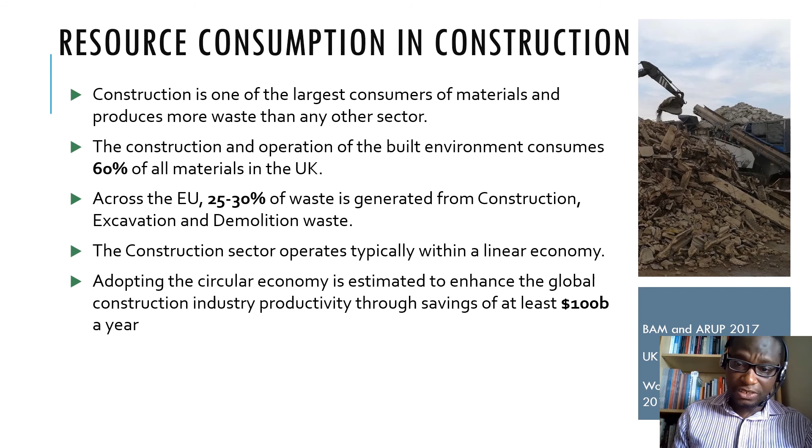And it has also been estimated that this transition could yield global productivity savings within the construction sector of about $100 billion a year. This was estimated during the World Economic Forum in 2016.

So what is the linear economy then? The linear economy is based on a take, make, and dispose model of production, where materials and resources that we use, say in our projects and built assets, would lose value over time and degenerate into waste. We are all familiar with that.

And whilst there have been regulations that have diverted a lot of the waste from landfill, landfill tax and the like, a lot of these still end up as less valuable materials, or sometimes materials that are having to be incinerated to generate energy from the waste.

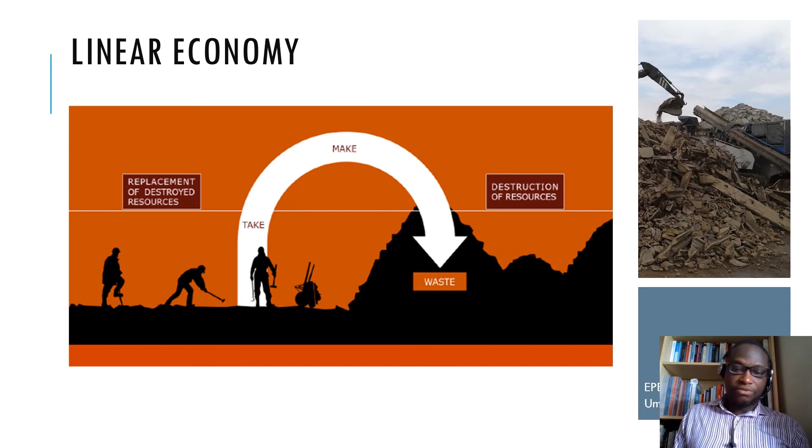The circular economy, on the other hand, is an alternative sustainable economic paradigm which seeks for materials to be kept constantly as useful resources, useful and valuable resources over time.

And these can be achieved, this constant utilization of materials by giving them, or adding value to them, can be achieved through reuse, recycling, repurposing buildings, remanufacturing, and things like that, maintenance.

So some of these are things that we already do very well in the industry, but there are also opportunities for a whole lot of other business models that can revolutionize the circular economy within construction.

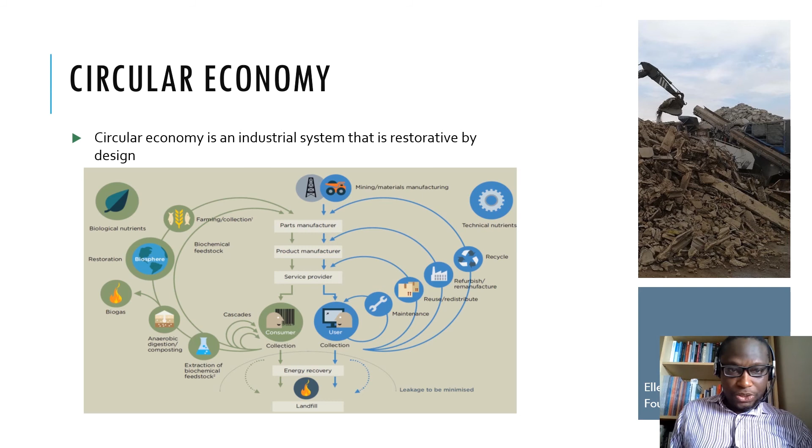So how can we achieve such a transition? It's very important that, in any effort to transition towards the circular economy, we drive that through the supply chains that typically are the lifeblood of the construction sector. And so supply chains that operate in the industry can begin to adopt more circular business models.

Again, when I use the term business models here, this is just the logic that underpins how organizations would identify, capture, and then deliver value to clients. So supply chains that adopt circular economy business models, I would call here, circular supply chains.

And so how can we transition our supply chains from linear to circular supply chains, since they predominantly operate based on a linear model at the moment?

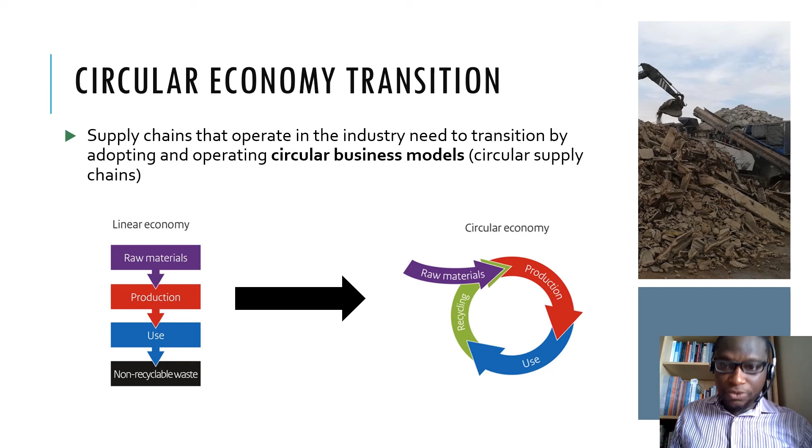And so there have been different typologies of circular business models, and in my own presentation here, I've classified these different typologies into several of them.

With circular design being firms that have specialized in designing for circular economy, designing circular buildings, circular infrastructure because they have the expertise to do so, or designing products that drive the circular economy, products that are easier to disassemble at the end of life of buildings. So we are looking at firms with expertise in, say, design for disassembly or design for adaptability, design for demountability, and things like that.

Circular construction business models, again, this would be for firms that want to package themselves and specialize in constructing or assembling built assets for the circular economy.

The products as service concept is based on firms specializing in selling the performance of their product rather than selling the products themselves. An example is the Philips pay-per-lux model that has been experimented with in Holland. But you can also have things like boilers being sold for their performance, so that the company still retains ownership of these, and people pay a reasonable amount for the service.

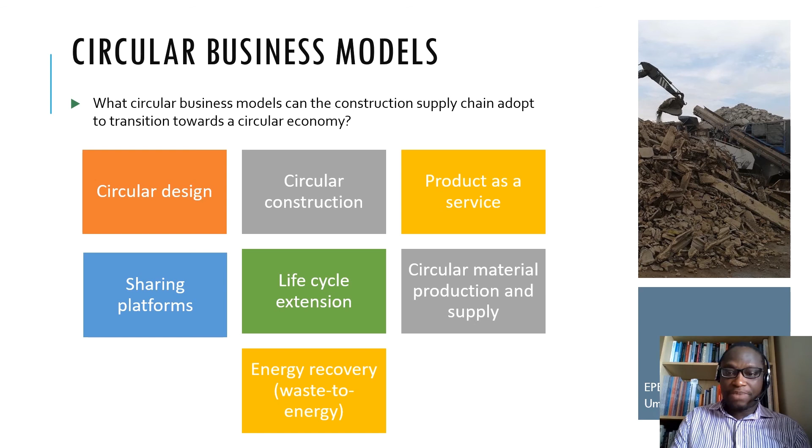So these are some of the circular business models that span the life cycle of a project from design to the end of life.

In the next 10 to 15 minutes, I'll be going over some of the resource consumption issues in construction that make it necessary to transition towards a circular economy, some of the circular business models that can be adopted, and some of the critical success factors for transitioning the supply chain towards the circular economy.

Now, how can we get more and more firms to begin to operate some of these business models that are more circular in nature? We carried out a study last year in France. Predominantly most of the firms were from France, and 3 of them in the UK, but in total we spoke to 14 participants. All these firms had adopted the circular economy and embedded principles within their business, and were operating as such. So we wanted to understand what are some of the issues, the critical success factors, and the like.

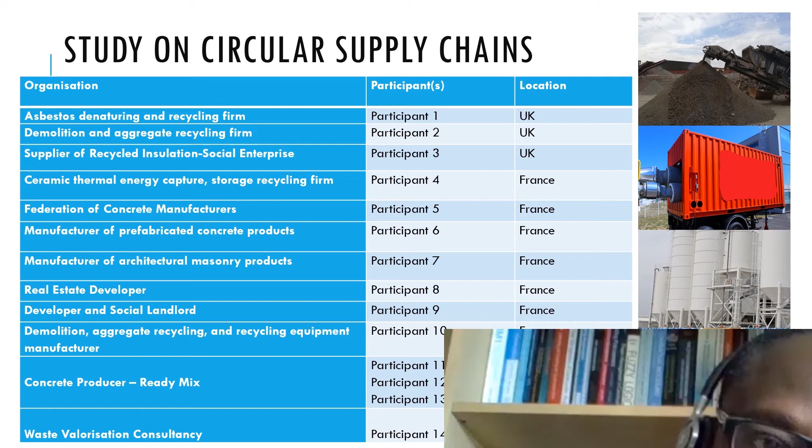To give a summary of some of our findings, one issue raised quite a lot was that there was still a need for more maturity in the market on the demand side, in terms of that critical mass of demand for circular products that would really get the transition moving.

That is quite interesting because it presents opportunities at the moment, since things are still at the early stages. It presents a lot of opportunities for firms that would be innovative enough to drive that transition as more awareness grows amongst construction clients trying to experiment with circular buildings and incorporate some of these requirements in their projects. So it may be more rewarding for firms that are early movers in trying to adopt circular business models within their organizations, although it would come with its own risk.

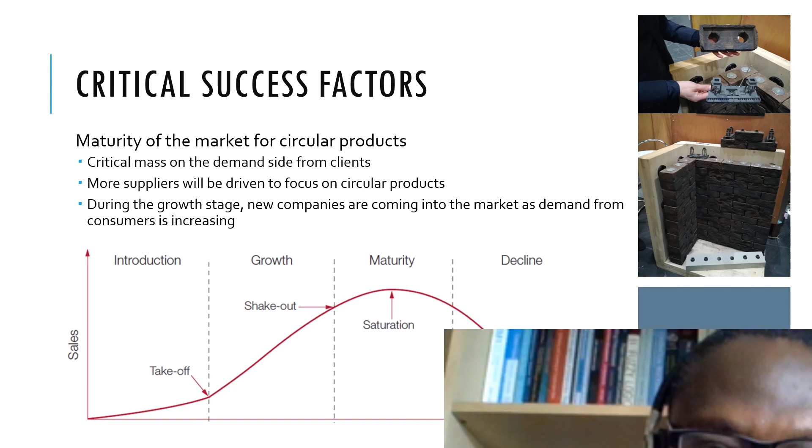Firms that produce new products like these interlocking bricks that I'm showing here, which are easier to dismantle. Some of the other critical factors were the need for mindset changes, and the way we communicate about products that have been produced from waste, given these are eco products that have to be stringently tested for their performance, especially in a post-Grenfell world, to make sure these meet very stringent performance requirements.

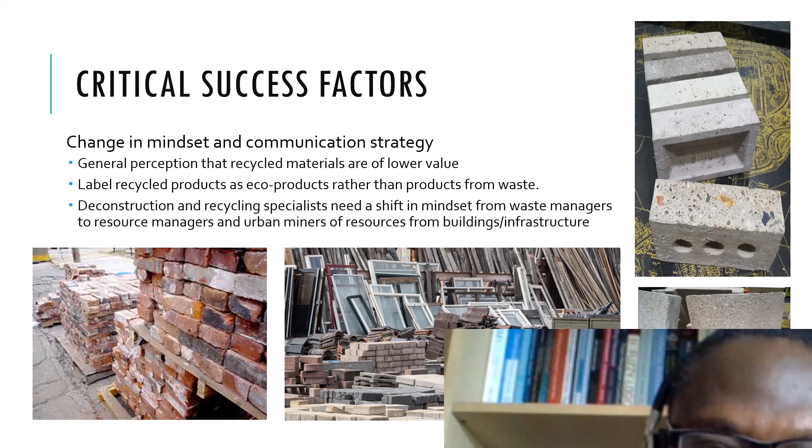And so why shouldn't they be valued as eco products in their own right? This was one of the key factors that a lot of participants raised, which is the need to minimize the cost of secondary production. One of the ways many have started to achieve this is the creation of shorter material flow loops, just to minimize logistics costs, bearing in mind there are costs of hauling materials from different sites, say to a recycling facility, storing them, reprocessing them, and supplying them back again.

Even incentives like tax breaks and carbon credits, and economic incentives policy-wise that can minimize the cost of secondary production, are going to be helpful, because these materials are going to be competing with regular materials from virgin sources.

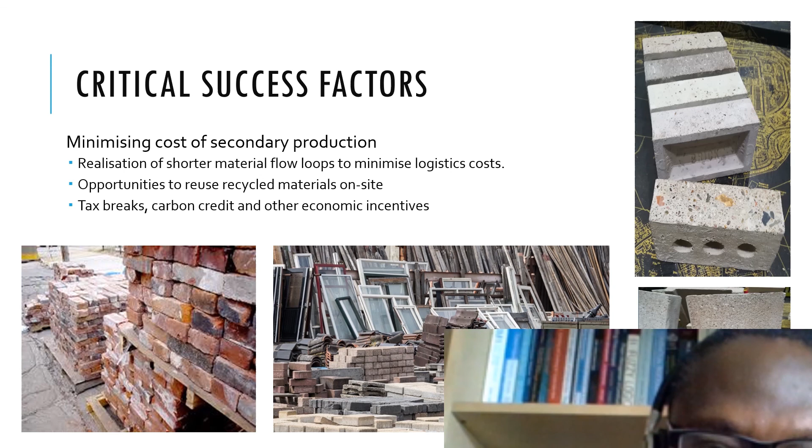Realizing an industry shift where we are able to design more for deconstruction is also going to be a critical success factor, because it facilitates the end-of-life aspect of buildings, where we can easily recover materials and resources at the end of their life. Things already happening, like material passports to facilitate those end-of-life decisions, are all going to be key to realizing this transition.

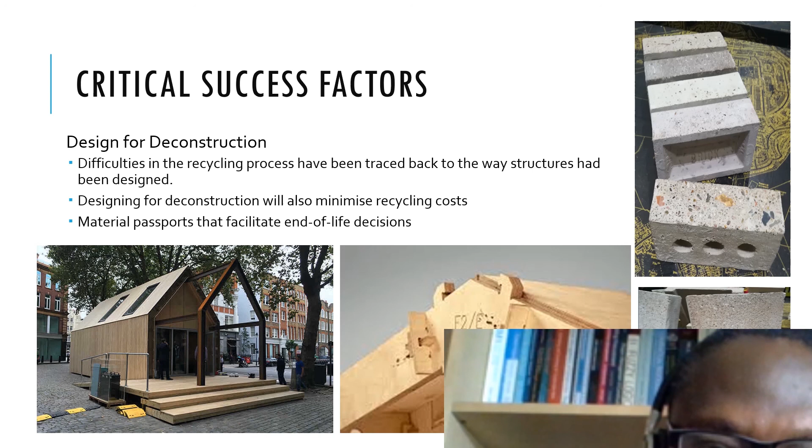Another key issue was the need for collaboration amongst industry stakeholders, and those stakeholders are very wide-ranging: planning authorities, major clients, insurers of materials, and those agencies that test and certify these materials. There's also deconstruction specialists - there's a need for greater collaboration here.

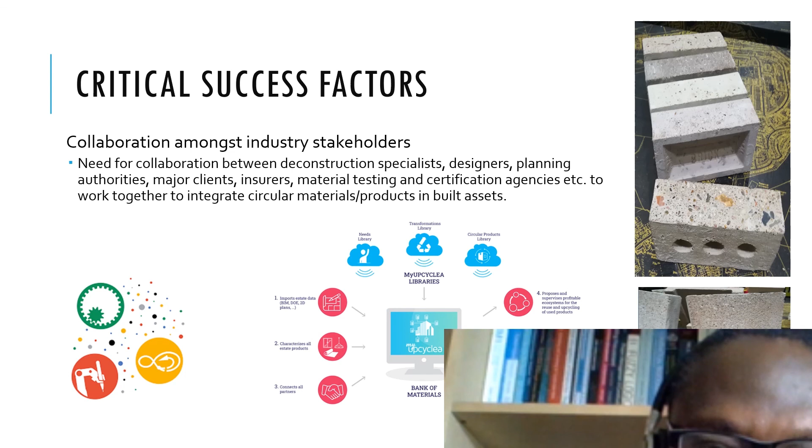A lot of Industry 4.0 innovations, like artificial intelligence and various digital tools, can support some of this collaboration needed to arrive at a transition.

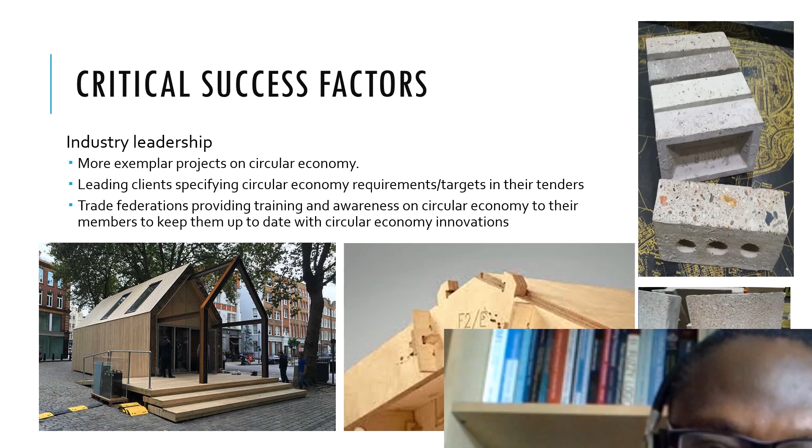There is a need for industry leadership - clients that will push for more demonstration projects that test the boundaries, clients that would incorporate requirements into their tenders for circular projects and circular infrastructure. That trend is growing, and there's a need for more of that to drive the transition.

There's a need for flexible regulations and standards that keep pace with circular innovations, because stringent regulations ensure that materials - whether recovered from waste or newly produced as circular materials - have to meet very stringent performance requirements. But we need regulations that keep pace with some of these innovations.

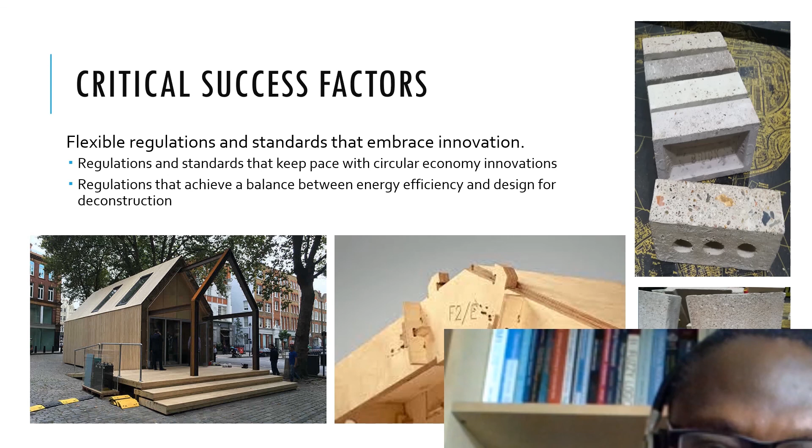There was also the concern that as the market for circular, recycled, and upcycled products continues to grow and mature, there will be a need for firms operating in this space to secure a lot more of these materials in commercial quantities for their own activities.

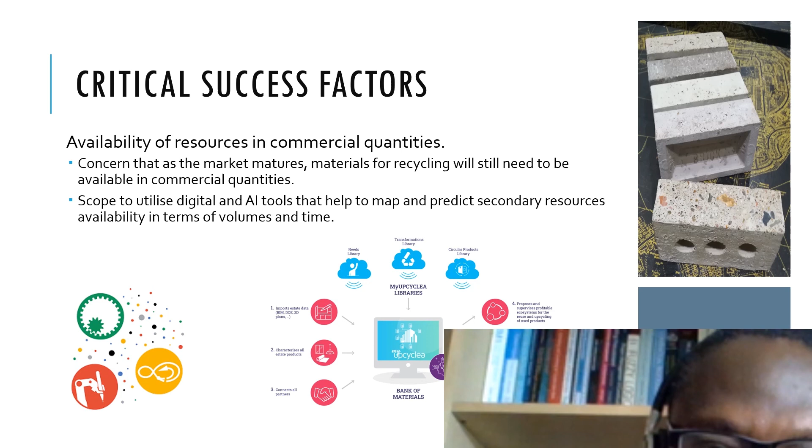That also presents an opportunity for leveraging AI tools that can help predict material deposits and material flows, and at what times, especially in collaboration with planning agencies, local authorities, and the like.

Supply chain firms operating in the sector would also have to be flexible enough to adapt their existing processes whilst they innovate on the circular economy. One of the firms involved in our study had to have a separate batching plant just for recycled aggregates, which shows there has to be a willingness to also accept some risk as part of this transition.

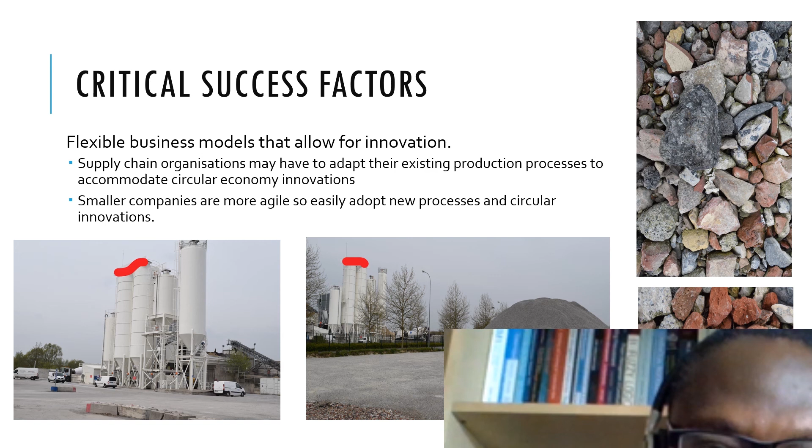So based on the views we got from our participants, these are some of the implications we have summed up, although there are quite a lot more, but for the sake of time, thank you very much for listening.

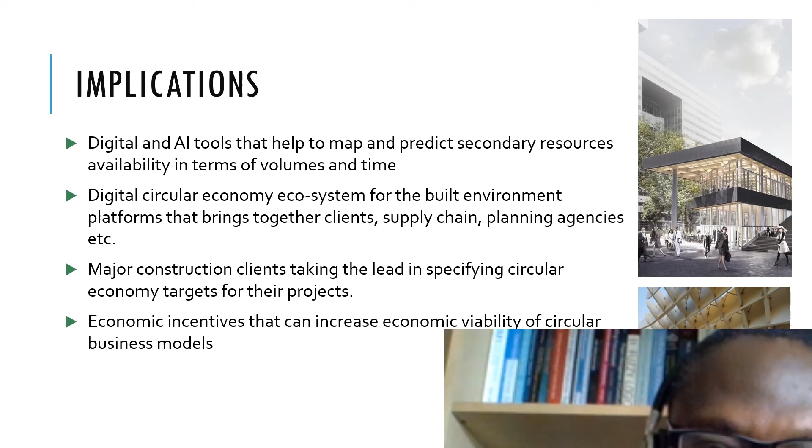In the next 10 to 15 minutes, I'll be going over some of the resource consumption issues in construction that make it necessary to transition towards a circular economy, some of the circular business models that can be adopted, and some of the critical success factors for transitioning the supply chain towards the circular economy.